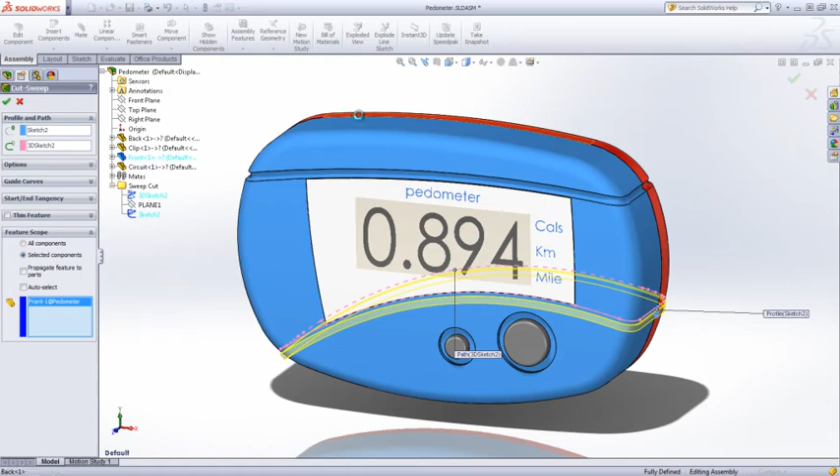The new swept cut assembly feature lets you create cosmetic features and details directly at the assembly level. It works the exact same way as in a part environment, and it's just as easy. If necessary, you can even propagate the results to the parts.

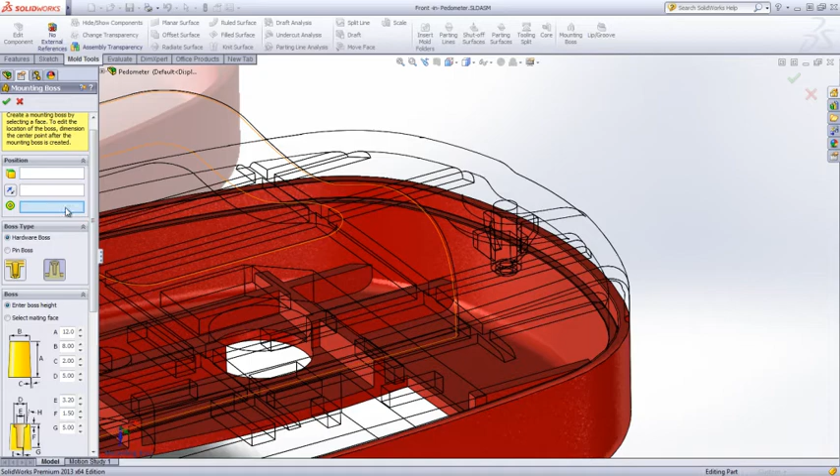Designers also benefit from an improved mounting boss fastening feature. In addition to the standard pin boss plastic feature, users can quickly create hardware mounts with screw recesses. The new intuitive interface offers more possibilities when adding mounts to your design. After selecting the prototype and placing the boss, you can modify a lot more parameters to get exactly the result you're looking for.

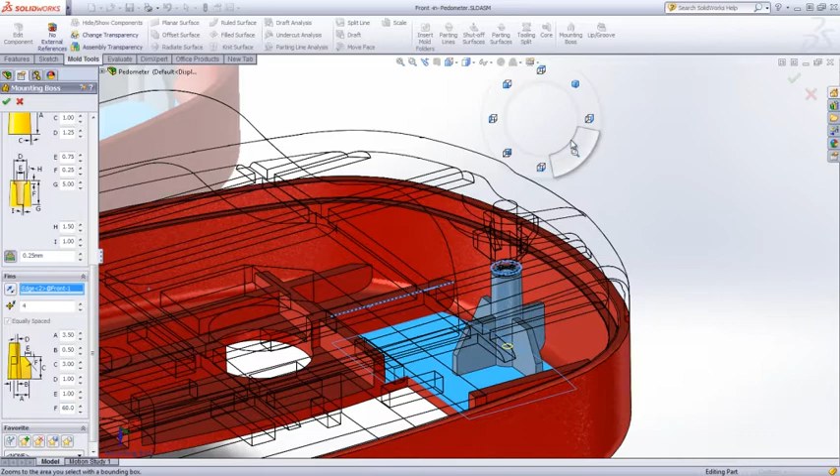Anyone designing plastic parts will also be thrilled with the fin profiles options that now support chamfers, not to mention that they properly extend into the sidewalls and combine freestanding fins for proper support.

Once the casing of the pedometer is completed, there's only one way to predict and avoid manufacturing defects that could occur during the injection molding process. With SolidWorks Plastics fully embedded inside SolidWorks, you can determine exactly how the part will fill, no matter how complex the shape is. Setting up the simulation is simple.

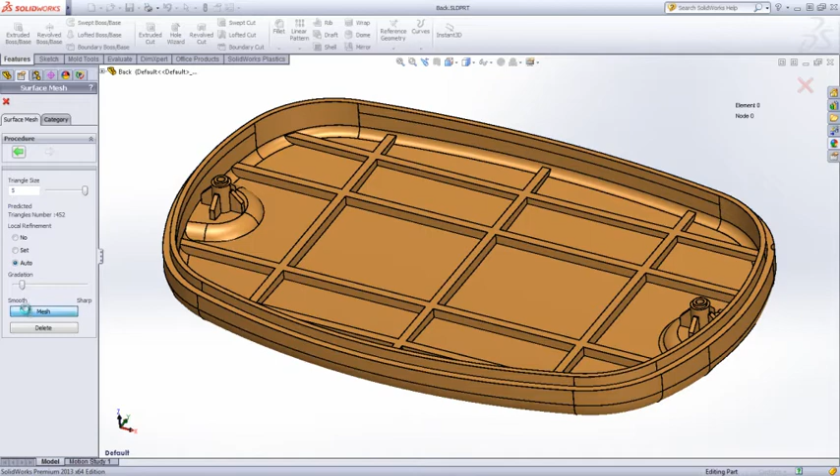Thanks to a powerful and fast mesher, you can mesh this part automatically or apply fine controls to get more accurate results. The material you use, of course, is very important. SolidWorks Plastics allow you to choose from an extended database of over 5,000 commonly used commercial-grade plastics with detailed properties.

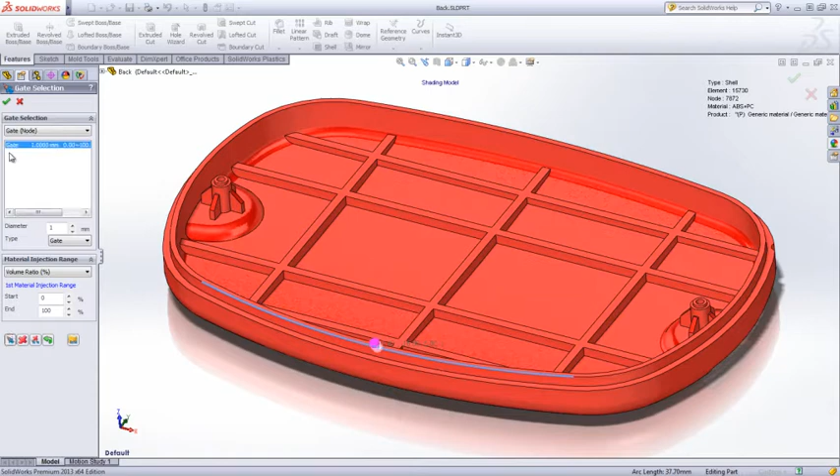Then, all you need to do is specify the injection location and eventually change some of the process's parameters before running the analysis to determine whether or not the part will fill with melted plastic. It takes a couple of minutes to simulate the process, but you are going to be able to ensure the manufacturability of the part and prevent costly mold rework.

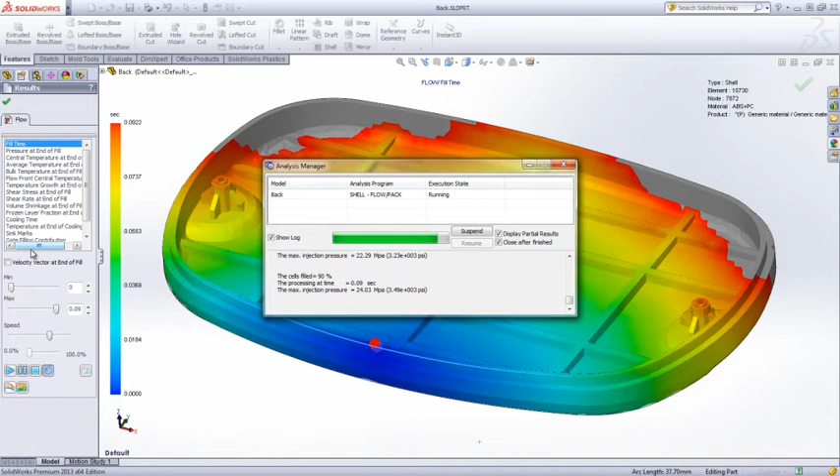This is what really makes SolidWorks Plastics so valuable. In addition to providing in-depth insight into the molding process, it helps you identify potential molding, cosmetic, or structural problems.

Once the results are ready, you can animate the fill time plot to see exactly how the melted plastic material is injected inside the cavity.

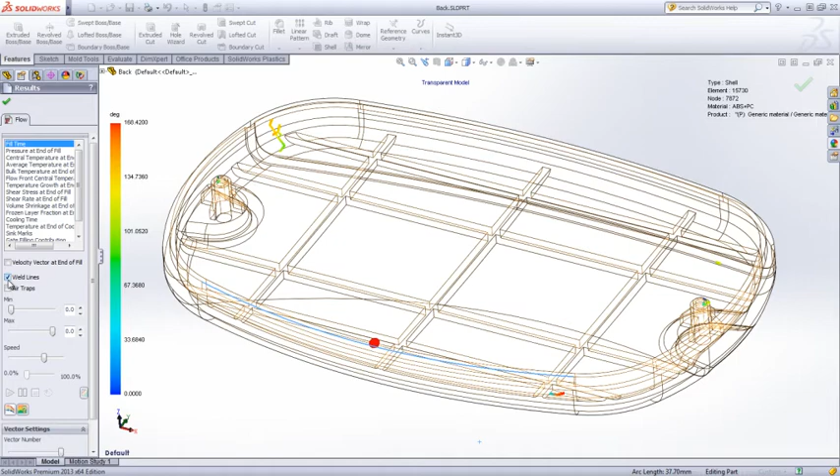You can also visualize the air traps or weld lines and take advantage of the many result plots that are generated in order to conduct a comprehensive analysis of the casing.

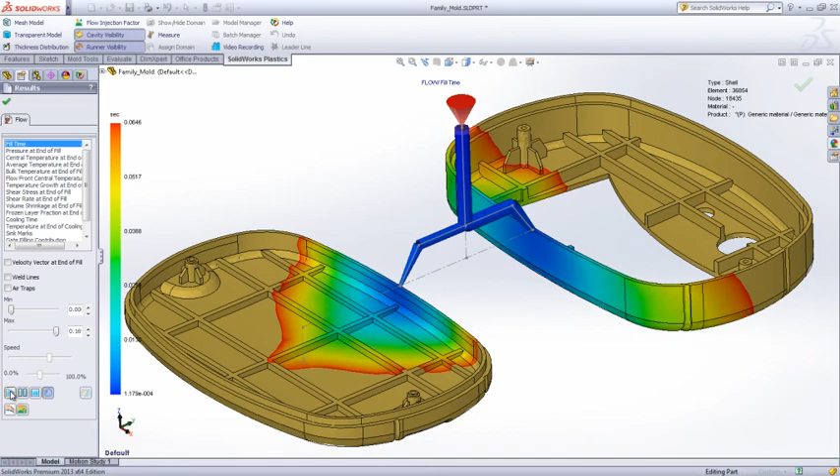Finally, you can move on to designing and analyzing the complete pedometer casing. Using a family mold layout guarantees that the mating plastic components have the exact same mechanical properties, color, and appearance. However, to ensure the quality of the part and minimize stress levels, the mold cavities need to be filled simultaneously. SolidWorks Plastics let you model, adjust, and automatically balance the runner system to rapidly optimize the feed system.

SolidWorks 2013 offers an unrivaled set of tools to easily design the most complex plastic parts and ensure their manufacturability.